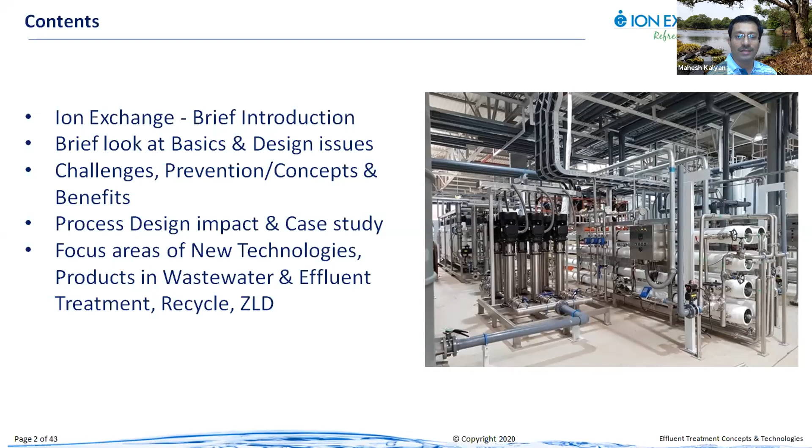So, like I said, a very brief introduction. I will start with my company. A lot of details about what we will talk about today in terms of technologies, products, and application notes are on our website. You can always log in there and download. It's free for all. So we are a 50-year-old company, in fact 55 years old now, and a leading player in the Indian market and also in the Asian market. We do complete projects in a variety of technologies for water treatment, wastewater treatment, effluents, zero liquid discharge, high purity water, pharmaceutical grade water; the whole water cycle and wastewater cycle we cover.

We are also into manufacturing not only equipment, but we also manufacture chemicals and special purpose resins, which are used in the water industry as well as in the pharma industry for a variety of applications. So this is a rather unique combination where we make equipment. We also have a very strong chemical engineering team with a very strong R&D backup, with several manufacturing locations all over India dedicated to specialized technologies. We also operate globally, exporting quite a few of our products to the Middle East, Europe and the UK. In fact, a lot of our high purity resins go into the pharma industry abroad as well.

So that gives you a rough idea of our capabilities in terms of FDA approved facilities for production and traceability when equipment or material is used in the pharma industry. And of course, a large service setup all over the country assures our customers that they are taken care of in terms of issues, applications, and so on. And with respect to quality, we can't do export and also survive in the Indian market for such a long time without a very high quality standard, and that is what our certifications talk about.

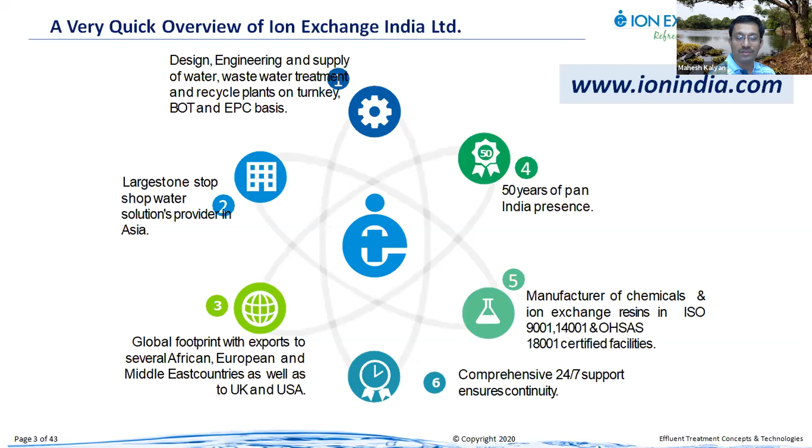Can you go to the next slide, Vijay? So this gives you a rough overview of our facilities in India. This is the only slide I have on the company at the moment, so that we save a lot of time and go into the technology part.

On the top left, in Gujarat, we make resins. The resins are basically organic polymer beads, which have a variety of applications. For example, a lot of medicinal capsules that people consume today have resins as an excipient, in which the active pharmaceutical ingredient is coated, and then you consume it. So that gives you an idea of what kind of facilities are required for manufacturing such products. And these resins are also used in the water and wastewater industry for specific adsorption, ion exchange kind of applications.

In Maharashtra, Rabale, we have an export-oriented unit, which is exporting equipment and products to Europe, the Middle East, and America also. In Goa, we have two facilities. One is a plant which manufactures equipment and assembles kits for membrane systems. We also recently started a membrane manufacturing facility. It's one of the first plants in India which is an integrated facility, where we start from liquid chemicals and out come membrane modules, RO membranes and ultrafiltration modules. So this gives you an understanding of the capability of the company in terms of really creating products made in India from basic raw materials.

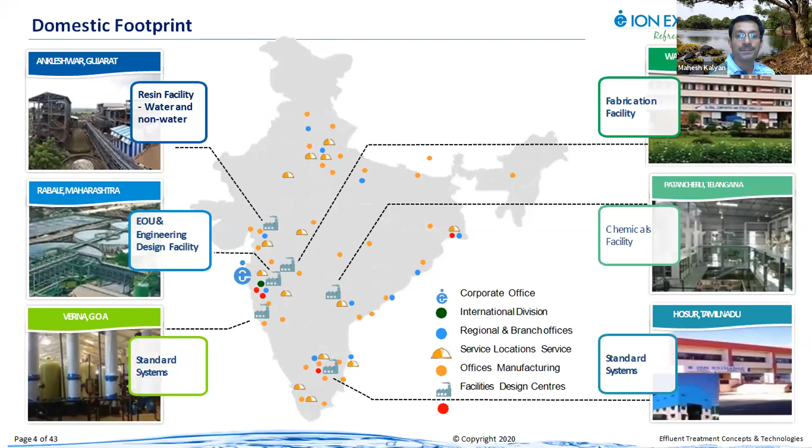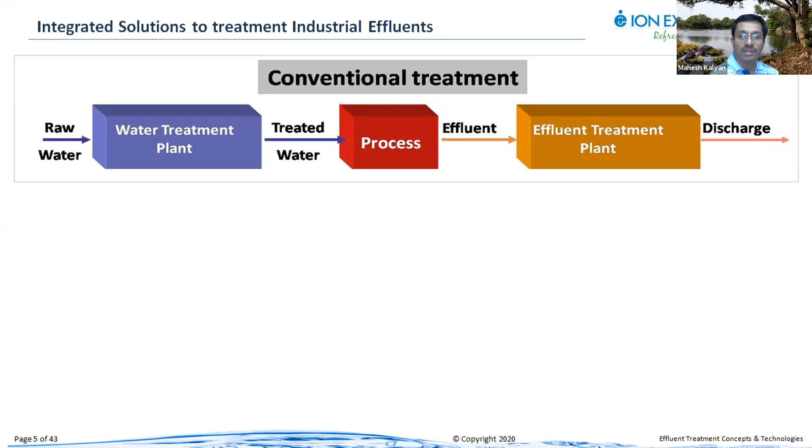So now we get into the portion of the presentation where we get the basics, so that everybody is on the same page when we start getting into the more technical aspects. So conventional treatment, where there is raw water coming on the left hand side. There is typically a water treatment plant which brings the water to a certain treated water quality, which is then used in the process. It could be used for washing certain things or in the manufacture of certain products. And after the process, out comes effluent, which has water and other waste material from the process, which goes into the ETP and gets discharged. So this has been the typical, conventional approach.

Whereas what we are looking at today is a process where we are trying to ensure we recover all the possible water out of the effluent stream, number one. Number two, in the waste stream there is also valuable material, so we are trying to recover the product also out of the waste stream. And with the recycled water, we can reduce our raw water consumption. So basically, with all this, we are lowering our complete water footprint. The amount of raw water that we use is reduced.

The amount of wastewater that we discharge is reduced, or at least minimized to the maximum possible, and also made as safe as possible for discharge, because we are also trying to remove all the contaminants out of the water, and wherever possible, even reuse the product. An example is in the textile industry, where salt is used in the dyeing process, and so far, there was a process by which we were recovering water and concentrating the waste.

And of late, what's happening is, if you are able to process that waste salt in an intelligent way, then we basically can recycle all the salt back into the process itself and reduce your salt consumption for the whole dyeing process. So which means not only are you reducing the water consumption, you're also reducing the amount of salt that is used for the fabric dyeing process. So there is, of course, a tremendous benefit, and the environmental damage is completely eliminated, because we are not sending out anything out of the plant.

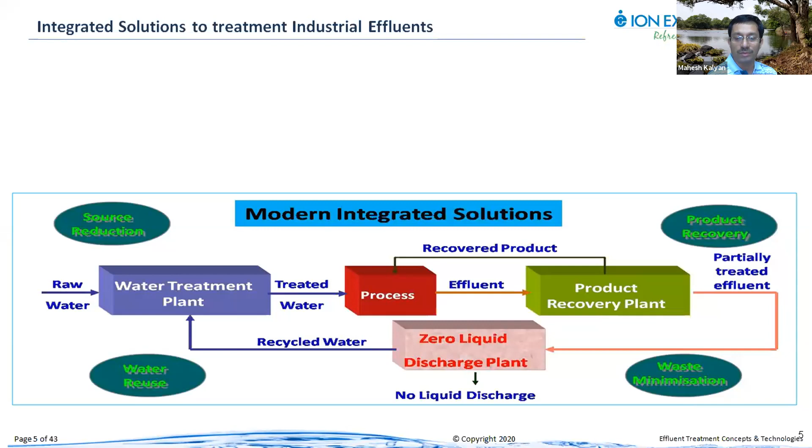So this being the overview, let's get into the next step, where I take you a little deeper into the process. A lot of us are familiar with a simple sewage treatment plant. Most of us have such a facility in our apartment complexes. We understand the municipal sewerage system. It's a process where there is a collection network. It comes to a sewage treatment plant, where the typical process is about physical separation of inerts; sand, stones, other larger items come out.

There is an equalization tank where the water is stored for some time, because the flow is not uniform. Typically, in a municipal setup, you have a lot of flow coming up in the mornings when everybody gets up, has a shower, and gets ready to go to work. Then during the day, there is a slight reduction. Then again, it picks up in the evening. And in the middle of the night, there is hardly any flow. So to normalize that flow, there is normally a facility in the plant for equalizing.

And then it goes into the treatment process, a biological treatment, where the bacteria is made to work on the sewage water. Then there is secondary treatment where it settles down, the bacteria is removed, and the water becomes that much clearer. Then it comes to tertiary filtration, then disinfection, and then it goes out into reuse or discharge. And as most of you are aware, in Chennai now, we are also getting into plants where this water is polished with ultrafiltration or reverse osmosis, and then taken back into the industry for process water use.

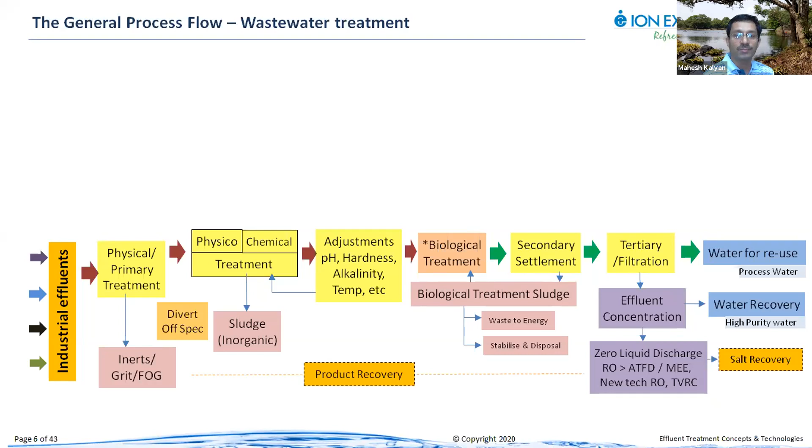Similarly, as long as you're able to segregate the waste streams well, we are in a strong position to apply a good technology for recovering the product or recovering water or doing both, or making it easier for the effluent treatment plant to handle it. So this gives you a rough idea of how the challenges are split.

In a typical municipal system, we are talking about quantity of sewage coming in and quality. Typically, if it rains, a lot of rainwater enters the sewer system. That is what Chennai is now trying to resolve with stormwater drains and rainwater harvesting, trying to keep the sewage system independent of stormwater. But as long as the plant is being fed the designed quantity of water and quality of sewage, it is able to work very well. The minute one of them changes, you have upsets.

On the ETP side, the effluent treatment plant, we have to be worried about a lot more things. It is not just the quantity, there is a variety of waste. When the waste comes in, the timing, because not all plants produce the same thing at the same time. There are different industries or different processes running. Each of them might discharge their effluents at different points in time. So that is something we need to consider.

And then manufacturing upsets. When the plant has a problem and there is suddenly a dump happening, how do we handle that? So these are the things that a typical ETP plant operator needs to worry about.

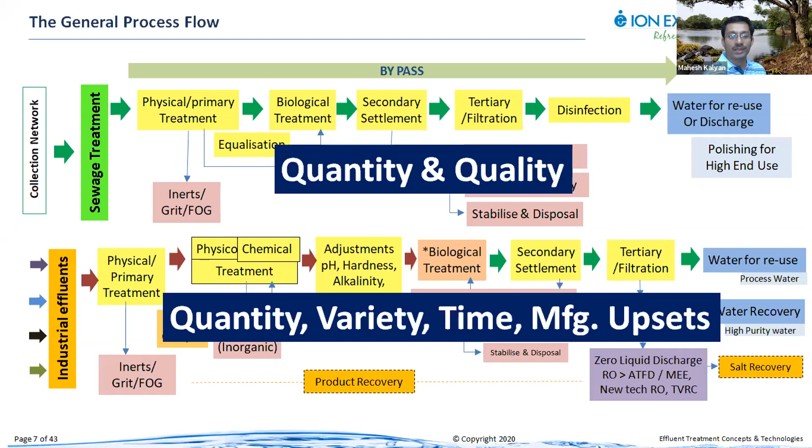And when we come into the whole analysis of the wastewater effluent system, we look at it from, let's say, three perspectives. The first one, the orange box, talks about the challenges that we face. Typically, this is what Mr. Bhaskaran was talking about. Every waste stream is valuable. The minute we mix them all up, it becomes a huge challenge.

As long as we can segregate the waste streams, and identify and study them, there is always somebody who will find that waste stream useful for his manufacturing process or his production. So as long as we are able to consistently deliver a particular waste stream of a certain quality, it can be made use of by somebody else.

Then again, the second point on the orange box is the characterization. COD stands for chemical oxygen demand. TDS stands for total dissolved solids. So these are a couple of parameters which determine how the plant has to be designed. So the minute we mix up a couple of these streams, it becomes very difficult for the ETP to be optimally designed. You might be able to still run the ETP, but efficiency will take a hit.

Then there are certain non-biodegradable chemical oxygen demands which need a very, very strong chemical reaction to break down those kind of complicated chemical molecules, benzene based or certain new generation long polymers. Then, of course, could be contaminants, heavy metals. Heavy metals have a big impact on the bacterial activity, and are also difficult to remove from the water stream. So how can we remove it initially itself?

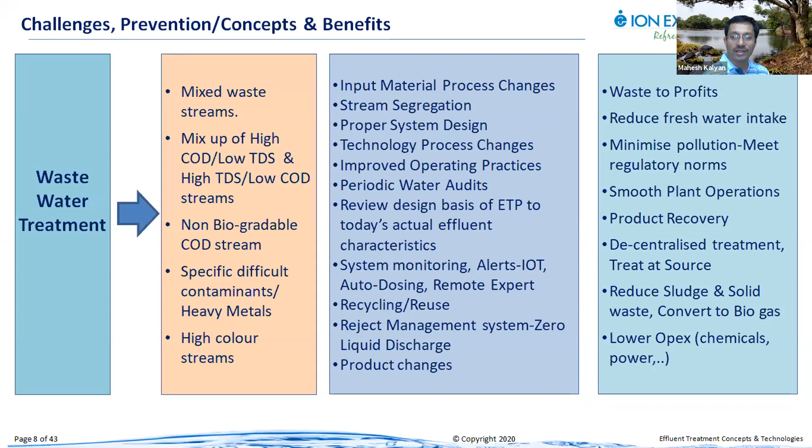So I will just have a quick case study. All of us, in the post-COVID situation, have been spending far more time in the kitchen, I guess. So I thought I would take an example from a large-scale kitchen, so that we're able to relate with the kind of effluents and why this effluent analysis becomes a critical topic. So this is the data from a kitchen that we recently studied.

The initial data that came to us was that they have a problem with their STP, a 200 KLD, 200 kiloliters per day STP, which was handling about 50 kiloliters of sewage and about 150 KLD of kitchen wash water. But they have a big problem. Typically what we know is all the load is organic. There are no heavy metals. There is no harmful stuff here. These are all easily biodegradable stuff. So why should there be a problem?

So the way we go about it is something called composite sampling, where we look at the waste streams every 1 hour. We take a sample and mix them all up, and then try to get a complete representative sample of that particular load over a period of 24 hours. Now we look at the flow patterns. Weekend load: this kitchen was supplying food to schools, which means they stop operating on weekends. So Monday morning is the peak load, and Friday evening the load goes down. The kitchen stops for Saturday and Sunday.

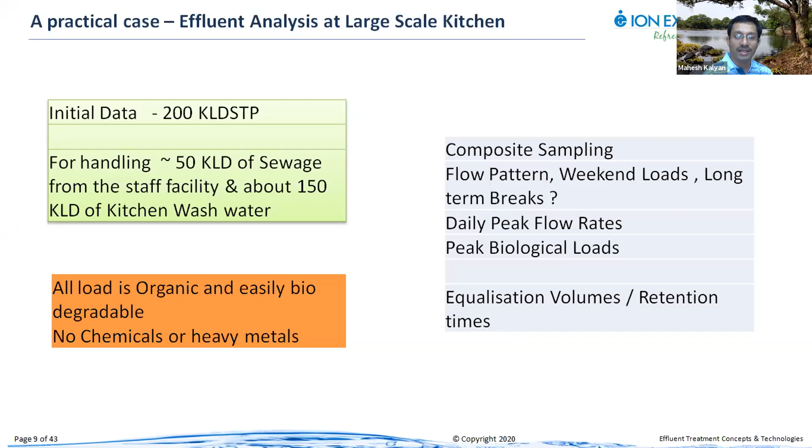Again, schools have summer breaks, which means 2 months in a year the kitchen is not running. So what happens then? How is the plant working in those days, and how does the plant start up again once the long break is over and the kitchen immediately comes back into operation? What are the daily peak flows? What are the peak biological loads? This is the study, and what comes out of it is something like this. So this 200 KLD is broken up into all these different streams.

All of us now, with experience in the kitchen in the COVID days, will look at this as typical stuff that we all do. We wash the rice. Dal is a part of the meal that is also washed. Then the rice starch is removed. The kitchen is washed every day. After the cooking is done, there is the floor washing. Then vessels come back, so vessels are washed. And vegetables are washed at a certain time. So this is the process flow they have, and all these different flow volumes.

And those yellow boxes. Can you go to the next slide, Vijay? This gives you an idea of all the different loads. TSS is total suspended solids, TDS is total dissolved solids, COD is chemical oxygen demand, BOD is biological oxygen demand, just to give you an idea. So the different flow volumes, and what kind of contaminants they have, is what I have highlighted. So the original concept was to mix all this together and treat.

And this, of course, is not sustainable, because once you design a plant for these kinds of loads, look at item number 5, for example, total dissolved solids: 13,790 is one parameter, at 30 kiloliters per day. And on the right extreme, you also have the sewage, which only has 400. And the sewage plant is going to be operating more or less continuously, because the staff will be there all through, whereas the starch water will come only 5 days a week.

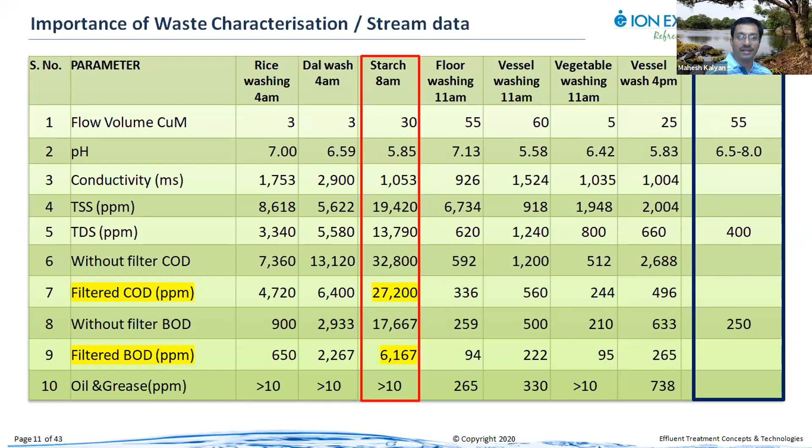And all the rest of the water, the rice wash, dal wash, the floor washing, all that could be combined, and we could still have a reasonably compact system handling that. The minute we try to mix the starch water or the sewage water in that, you have a very sub-optimized system which will not work, because it simply cannot handle such extreme variations. So this gives you a rough overview of how effluents need to be really categorized very carefully. Can you go to the next slide, Vijay?

So that is where water audits become a very, very important portion. Again, people like IWMA, CII, and even we as a company do water audits. This comes out of a lot of experience, multiple disciplines. It's chemical engineering. It's understanding membrane processes, what can work most effectively for this effluent. So this kind of team, once it studies the effluents available in the plant and also understands performance issues, can probably give a much better recommendation, a good design which can handle all the variants.

The second important point is flow metering. A lot of us estimate flow based on our gut feeling. A pump is running for 3 hours, it is going to discharge so much water. That could probably be the basis of the whole flow audit itself. This again is true, but more often than not, the pump's performance changes with a lot of parameters. What is the head? What is the kind of scaling on the discharge pipe? What is the level of water in the suction tank? All of it determines the flow output of the pump.

Traditionally flow metering was a costly subject because the flow meters were expensive. But today we have a lot of technology with clamp-on meters, temporary meters. You can get someone to come and fix a couple of meters, do a flow audit for 2-3 days, 1 week, and get a very good, accurate map of the whole waste stream coming from different units in the facility. Either it's a single big factory or even multiple factories coming to a common effluent treatment plant, you can do a good flow audit, which will give you a very good, accurate prediction of the volumes.

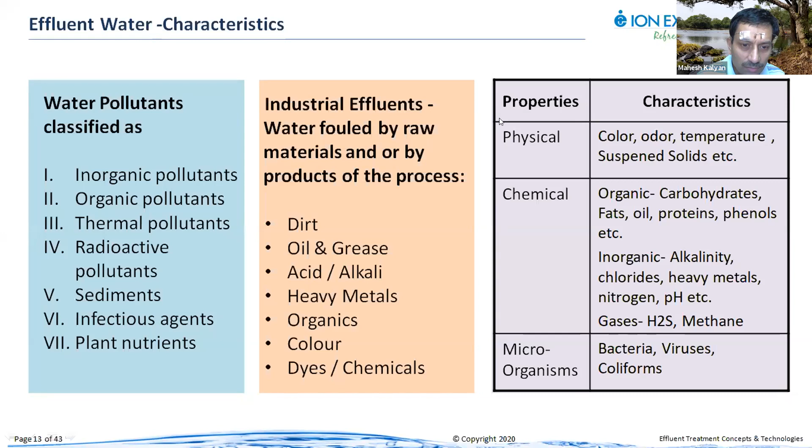I have a difficulty in changing the slide. Yeah. Vijay, shall I take over? Yes, sir. Yes, sir. Yeah, a moment, please. Yeah. Okay. Yes, sir. No worries. Yes. So while Mr.

Mahesh has just emphasized the types of technologies and the steps to achieve zero liquid discharge, I would rather spend time step by step on primary treatment, the biological systems, the tertiary treatment plants and reject management, to achieve zero liquid discharge. Basically, the primary treatment is one of the prominent steps to achieve zero liquid discharge, because here you control the complete downstream performance of the anaerobic process or tertiary treatment, particularly in terms of saving the OPEX cost of a particular design.

On the primary side, we look at ceramic filters, basically for product recovery, and advanced clarifiers in association with the existing conventional primary clarifiers, followed by a laminar clarifier or an HRSCC, with UHRCC being one of the advanced clarifiers here. DAF is one technology which plays an important role in removing the emulsion oils. The advanced oxidation systems and electrocoagulation systems also constitute the primary treatment.

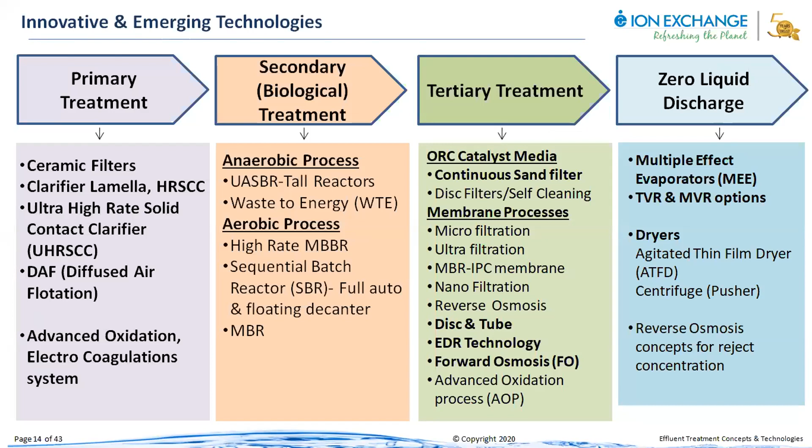So in the primary, we are all sure and thorough with the process: screenings, grit removal, oil removal, these are the prime steps, and further the clarifications. One important thing in the oil part is to concentrate the coolant oil, or the oils, at the beginning, where you recover this oil with the help of ceramic filters. I'll show you in the next slide how the ceramic membranes do the role of oil concentration.

In the sedimentation, clarifiers and primary clarifiers have played a major role, where you do the pH corrections, heavy metal precipitation, and also remove the suspended solids to a great extent, so that the downstream biological system isn't hindered in terms of performance. In the clarifiers, we'll look at the lamellar clarifier or the HRSCC. UHRSCC is one of the advanced technologies here.

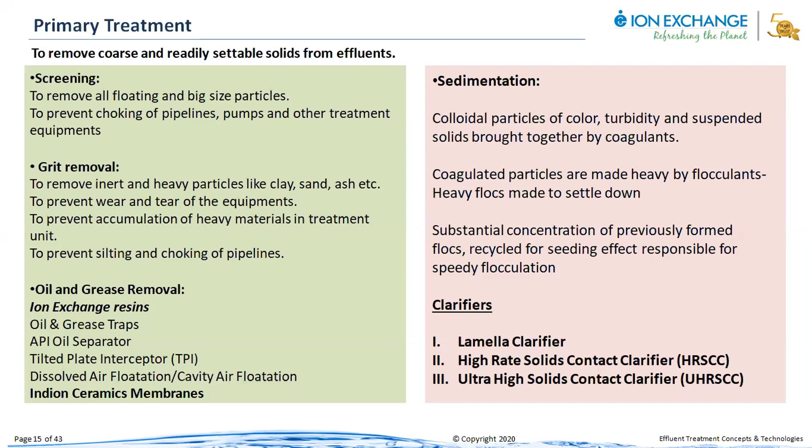The ceramic membranes basically have an MOC of silicon carbide. The silicon carbide gives the membrane more toughness, where it can resist up to 800 degrees centigrade. It operates in the pH range of 0 to 14, and high flux rates can be drawn, up to 300 LMH in terms of the permeate from the membrane surface. The fouling of this membrane is very low. That's how it becomes a high performance membrane system.

So the applications: if you want to recover a product which is contaminated with oil, and you would like to recover that oil and concentrate it further for reuse or for sales, this membrane can be used. In recovering heavy metals, the ceramic membranes also play a role. And of course, the basic function of any ultrafiltration membrane is to remove colloidal particles and TSS, and they're used as a pre-treatment.

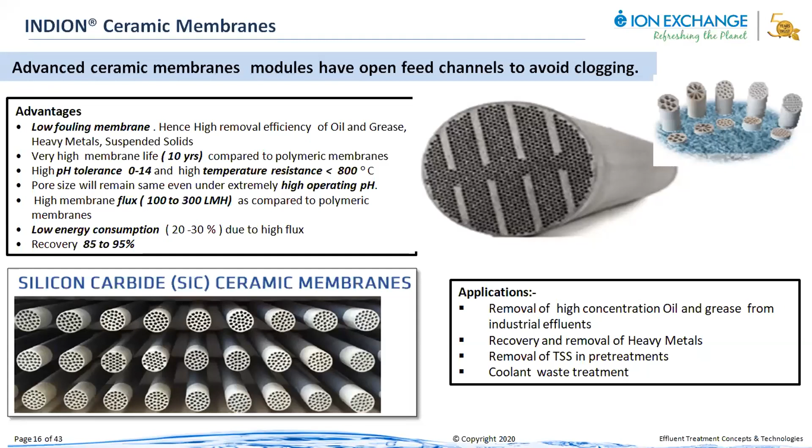So when we look at the ultra high rate solids contact clarifier, we must understand the basics of the lamellar clarifier, how its performance is achieved with rise rates of about 1.4 meters per hour. On the right side you see a picture of a typical lamellar clarifier. The raw water, the water which needs to be treated, is pumped into an SMFT, which is a static mixer flocculation tank.

In this tank, we add flocculants and coagulants, so that the particle formation is made heavier and further settles down onto the lamellar plates. The lamellar plates are inclined in these slots at about 60 to 70 degrees, forming an inclined plate technology.

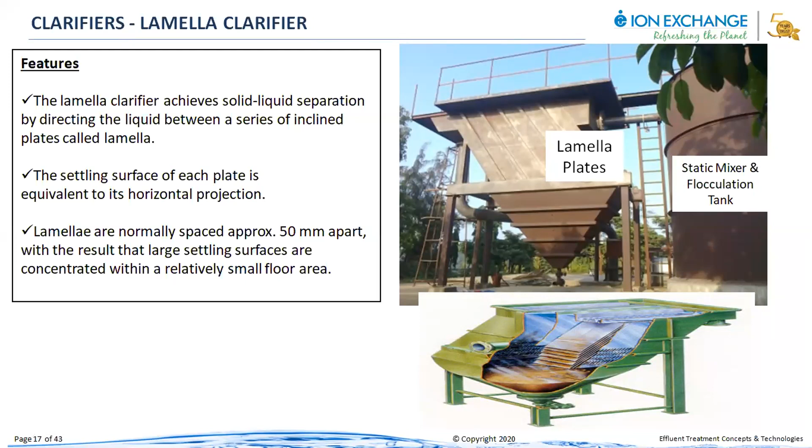In the lower picture you can see the water rise on the surface of the plates, and the heavy particles which have been agglomerated or flocculated settle down at the bottom of the hopper, and the clear water comes out. So the lamellar clarifier is a proven technology existing for the last 20 odd years in the Indian context, and abroad probably for a very long time. The second clarifier we look at is the high rate solids contact clarifier.

This is taking over the conventional clarifiers, where we talk about clariflocculators, where the flocculation zone and the coagulation zone is outside the premises of the clarifier. But within the HRSCC, there is a draft tube which is inside the clarifier. The chemicals are dosed in this particular zone here and given a retention time, and within a very short time of retention, you will achieve a good floc which overflows, and then it is collected at the bottom of the tank, and the clear water comes out with rise rates up to around 3.6 meters per hour at the velocities you have in a typical HRSCC.

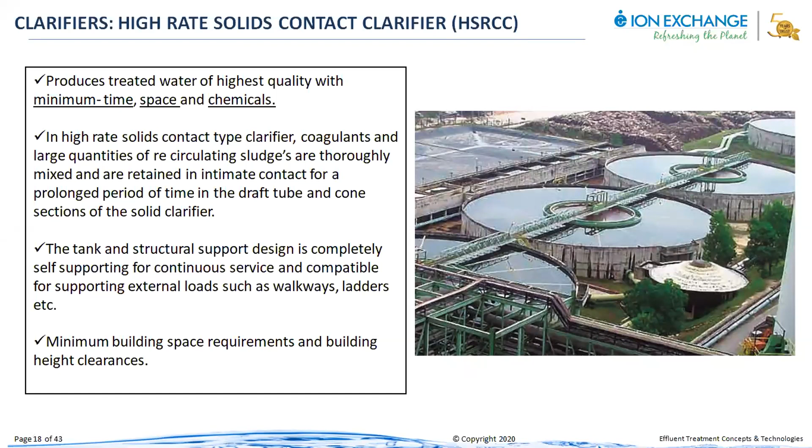So I think we'll spend a little more time on this particular thing, which is the current updated technology, where it takes over the advantages of a lamellar clarifier and HRSCC. What it does is it integrates both into one single system. The raw water is pumped at the bottom of the tank, and then it is pumped into the draft tube. This particular area is a draft tube, where the polymers and the coagulants are dosed from the top with the drive on the top, and it's continuously agitated.

In the process, you get continuous flocs of a heavier size, which settle down at the bottom, and you get clear water which is deflected and passes through the lamella plates, which are inclined on either side of the draft tube. So you get clear water, and in terms of TSS or turbidity, there is good control.

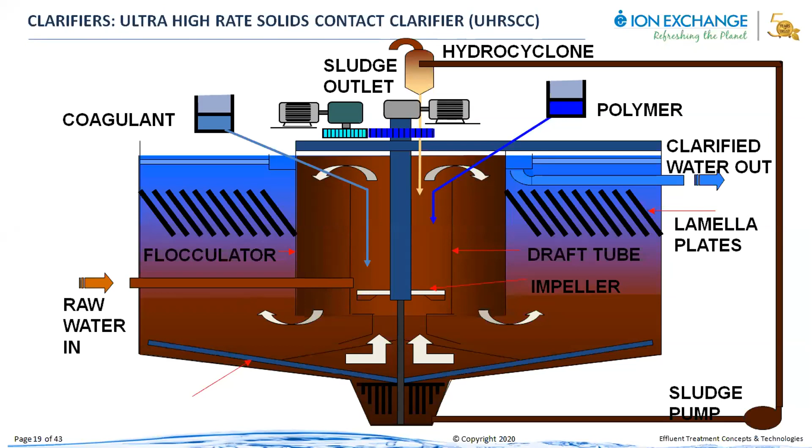Now, what makes the ultra high rate solids contact clarifier a more advantageous product is that the rise rates in this particular clarifier go up to 15 to 20 meters per hour. In doing so, the chemical consumption compared to normal clarifiers will be saved up to 15 to 20%. And the energy, the footprint, and the overall operational efficiencies are improved in a UHRSCC.

So where do we find these applications? In a lime softening process, removal of colloidal silica, color removal in the industry, white water recycling, or heavy metal precipitation. Once you get proper treatment out of this, you can achieve a TSS less than 15 ppm. That is very significant when you see the operational performance of a clarifier, even in turbid conditions.

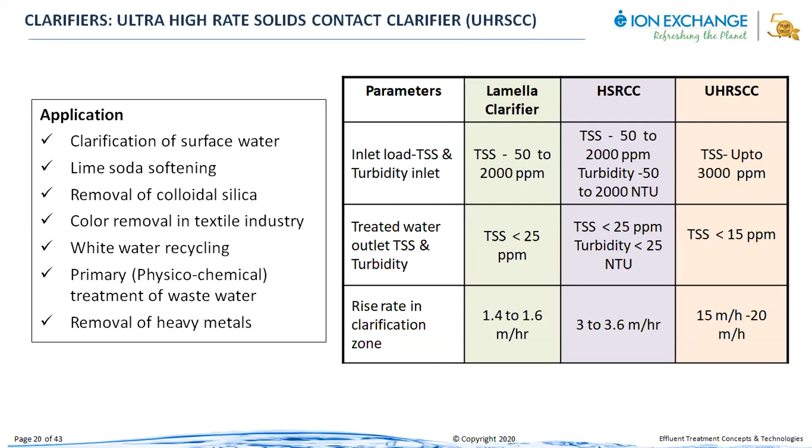So from the primary side, we'll move into the secondary. I'm sure I need not introduce the basics of this particular thing. Still, we'll look at what we are trying to achieve. In secondary treatment, we try to remove the organic matter via oxidation by microorganisms, in a natural way rather than using any kind of toxic chemicals. So COD and BOD are the familiar terms we are going to use, where we would like to remove this particular stuff with bacterial growth in the reactors.

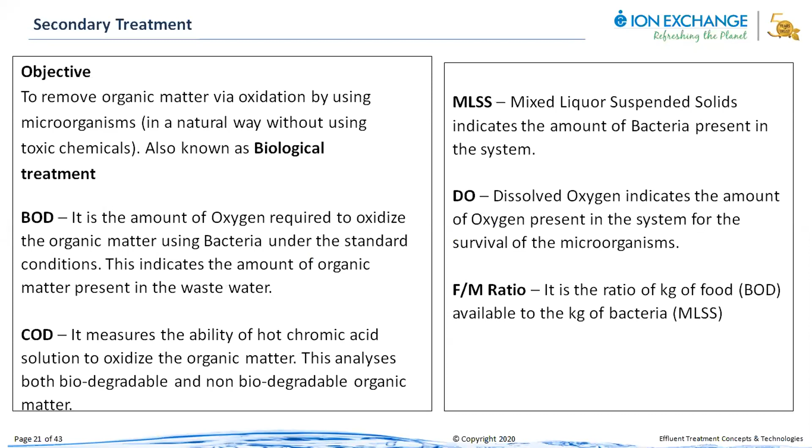In the anaerobic side, digestion has existed for a very long time. So UASB, where the COD loads are very high, and you would like to get the energy, I mean biogas, without spending any kind of external air. Anaerobic processes play a major role there. So here we will be looking into tall reactors in the slides to come.

In the conventional, we look at the fluidized media reactors and the MBR technology, which will have a performance where the water becomes absolutely to drinking standards. That is how the MBRs perform.

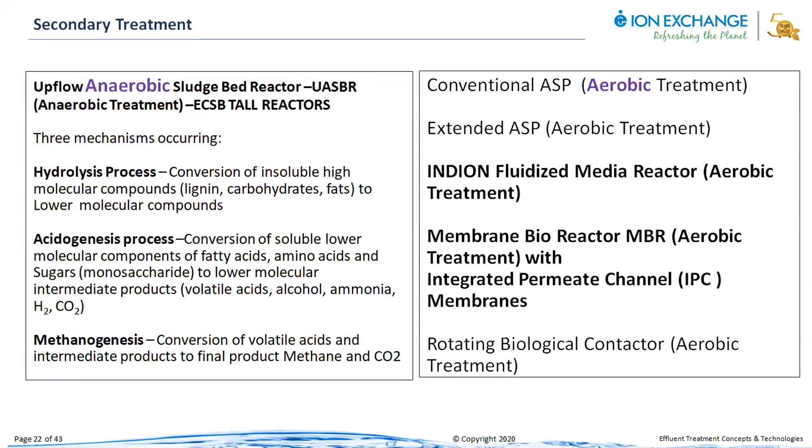These are the conventional UASB reactors. What Ion Exchange has done in the process is, see, this is a picture of a typical UASB reactor. There were a lot of drawbacks in the conventional design in terms of distribution, the gas being collected, the biomass separation, or the corrosion within the reactor.

So Ion Exchange has ensured that all these parameters were addressed, like corrosion, with the change of MOCs from MSEP technology to FRP, and the distribution was done through a top distribution system where the water is introduced to the bottom of the tank. In anaerobic reactors, basically the function is ensuring there is a continuous feed throughout the complete surface. Now, what we found out was that in the normal reactors, it was clogging because of the pipe distribution system there.

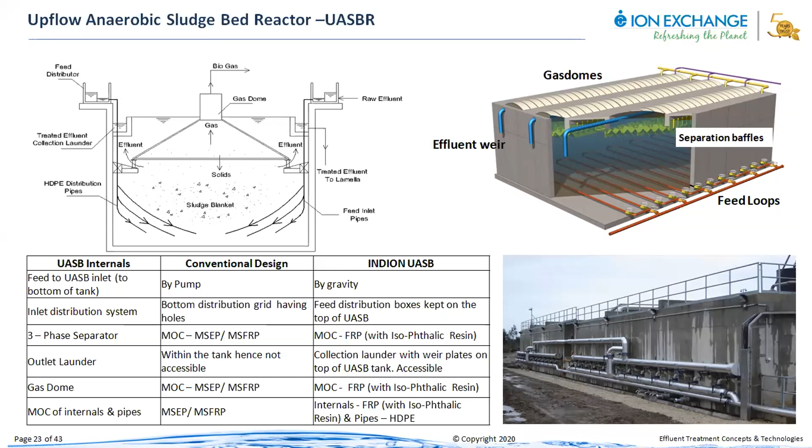Yeah, this is a state-of-the-art kind of technology called tall reactors. The conventional reactors had a lot of setbacks or performance issues in terms of digesting high COD levels. Now, a tall reactor can handle up to 35 kgs per meter cube per day kind of volumes there in terms of COD.

What is done is the water basically can travel up to a 25 meters kind of a reactor, unlike a conventional reactor. So the water is introduced at the bottom of this particular reactor with a fine distribution system, and it passes through two different separator zones where the gas and the biomass are separated out very efficiently. The biomass is returned to the bottom of the tank, while the gas is collected into the next chamber, which is called a neutralization pit.

Now this makes the anaerobic reactors different from the existing reactors in the conventional market. So the USBR or the ECSB technology has a neutralization pit which collects the biogas from the various parts of the reactor of the ECSB, and the complete gas is under pressure, ensuring that there are no leakages. So the corrosion in this kind of a reactor is also minimal, because no external air has been provided, and there is no chance of any kind of slippage of biogas either.

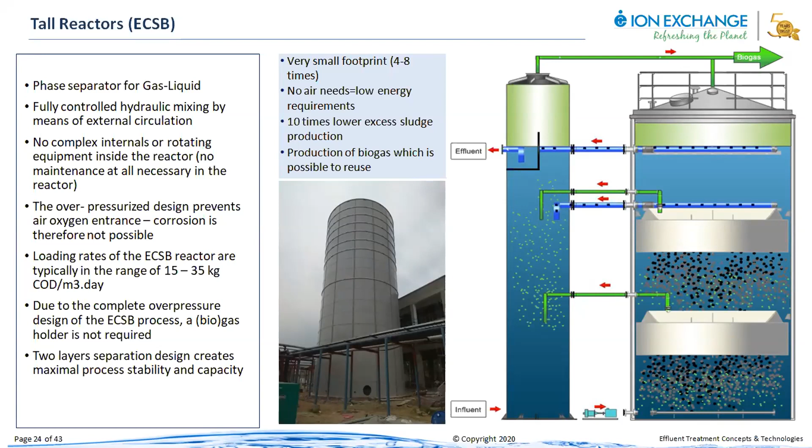So in the aerobic treatment, we have the fluidized media reactors, also moving bed bioreactors. Basically, the media is suspended. This is a typical MBBR technology, where the water is collected in the collection tank and is pumped into an aerobic zone 1 and zone 2, where the media is suspended, and with a retention time of about 1 to 2 hours, the water is absolutely treated for the COD and BOD, and eventually it passes into a next level of treatment using lamella plates as a technology.

There are also multiple ways of doing it, but we felt that this particular plate technology is easy to clean. So the water rises above the plates and then comes into the chlorination zone, where it is further sent for tertiary treatment. The media which has been suspended has a good surface area for the bacteria for attached growth.

The high rate MBBRs are more significant for industrial wastewaters, while the basic MBBR technology has a limitation in handling industrial effluents. It was more for sewage treatment plants. But when you look at high rate MBBRs, the media used inside is a highly porous media with a carbon impregnated substance on it, so that there is high porosity, and the adsorption of the COD or the BOD on that particular surface is also high.

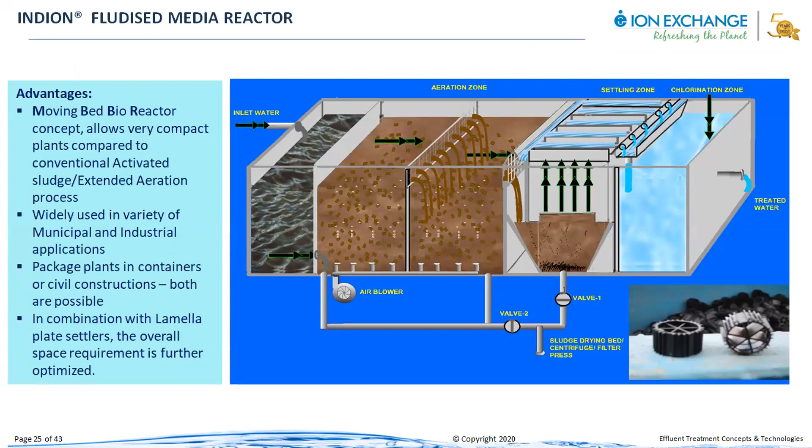So now, Vijay, I'll just make one point here on the earlier slide. See, in a typical MBBR, what Vijay talked about one slide before, here it is mainly an aerobic bacteria that is operating. Whereas in the high rate MBBRs, the microbiology is far more sophisticated. Can you go to the next slide?

So in these kinds of media, within each of those plastic, let's say sponge-like media, the outer surface is a high oxygen surface, and the inner area of that sponge becomes a low oxygen surface, where different kinds of bacteria are able to operate within the same tank itself. And that is the trick, or the key difference with respect to how the whole process operates.

So superficially, it all looks the same. In one place we use a plastic kind of disc or something, and in another place we use a plastic foam or a sponge. But the way the microbiology works is very, very different. And so this is where this whole ETP topic is a multidisciplinary topic. You're talking about chemical engineering. A lot of microbiology is coming in, and of late it is getting even more sophisticated.

The same story also with the tall reactors, anaerobic reactors. The whole microbiology there, in terms of the kind of sludge that develops on the reactors, is very different from what we were generally used to the last 10 years. Yeah, back to you, Vijay.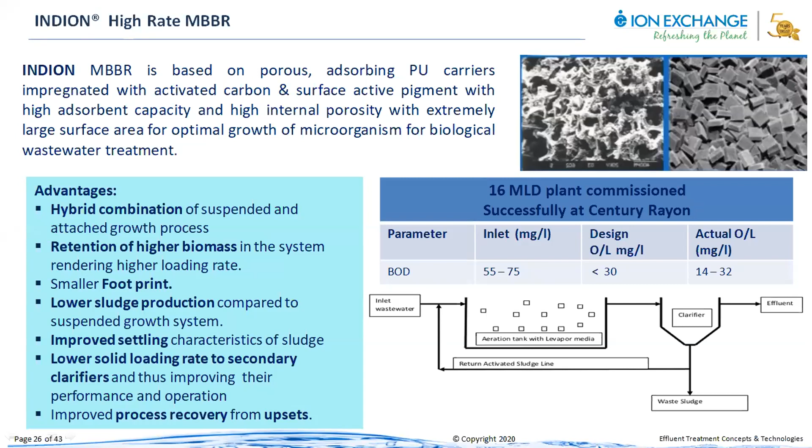Yeah. I think we have a success with this particular project at Century Rayon. So that is how we felt that this particular thing can be more useful for the aerobic treatment systems compared to the extended aeration or the secondary clarifiers.

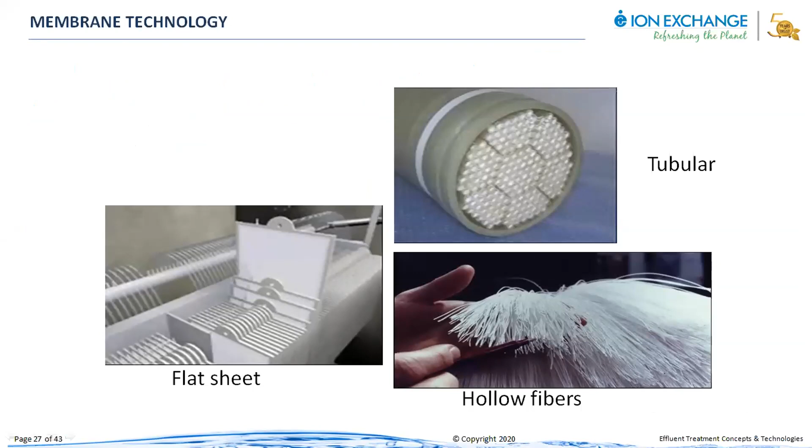So we'll move to the membrane technology, which is one of the sophisticated things in the treatment of both sewage and also the industrial wastes. For quite long, the tubular, the hollow fibers and the flat-sheet membranes are in the market. But before we move into the ones which Ion Exchange is looking at, the IPC membranes.

For the concept, in a particular process of handling the sewage water, the water is subjected to the anoxic treatment and then aerobic treatment, and further it's sent into an external MBR, where the membrane acts as a physical barrier for suspended solids and also the viruses and the bacteria, and the clear water is sucked out from the membrane surface.

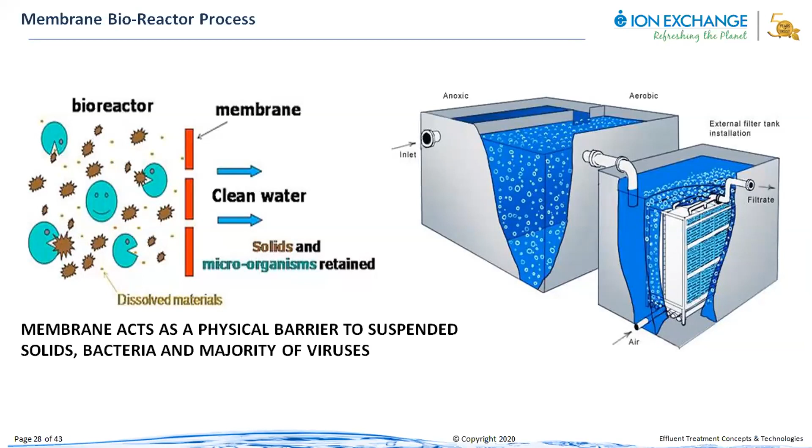So how does MBR make savings when we look at a conventional process or an ASP process? It cuts down on a lot of equipment related to aeration, clarifier, recirculations, the tertiary treatment, and further polishing of that. So an MBBR technology is superior, but the MBR further exceeds the performance of the MBBR technology. This is also existing in the Indian market for almost 15 years now.

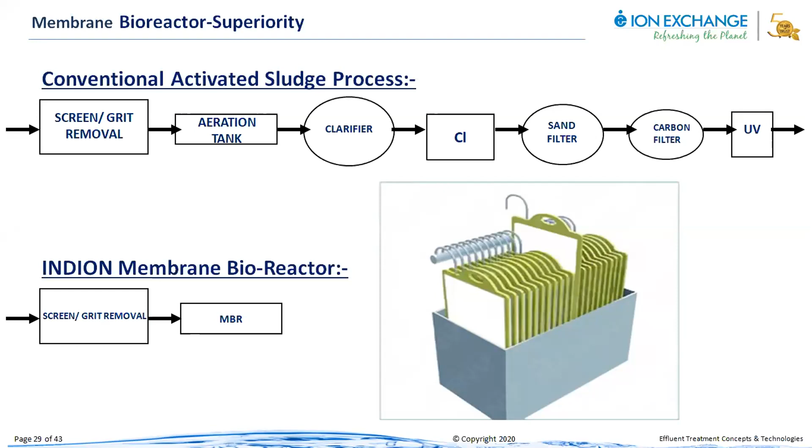But yet there are a lot of issues in terms of fouling and the flux rates, and issues related to the performance of the membrane and the life of the membrane coming down. So in order to address these challenges, Ion Exchange has tied up with a company in a joint venture for developing specific membranes called integrated permeate channel membranes.

Now these are basically flat sheet membranes, like a net, a textile coated network, where the membrane is pasted on the surface, and the internal structure allows for the removal of any suspended solids; it acts as a barrier.

Okay, so by improvement methods, what we are looking at is to increase the flux rates as high as 40 to 50 LMH and reduce the transmembrane pressure. So the TMPs are up to 2, where the membrane cleaning is easy and the membrane ruptures are very minimal, and you get outlet performance with BOD levels up to almost 2 ppm. So that's the level of achievement when you have it in the form of an MBR.

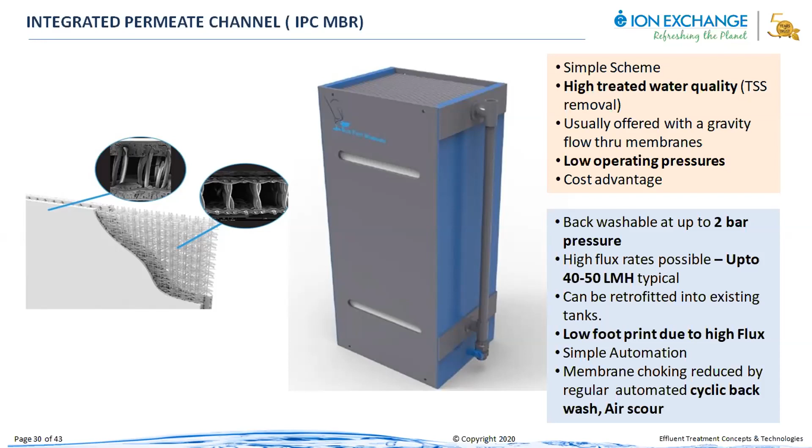Yeah, this is a site installation of an MBR at a pilot location. So what we found out was the BOD levels are achieved up to 99%. The phosphorus levels are also at the minimum. So nutrient removal is also possible when we go through this particular process.

The coliform bacteria has a 6 log reduction, to get pure clean water even for drinking purposes. Of course we don't recommend it, but that's the quality you get out of an IPC membrane.

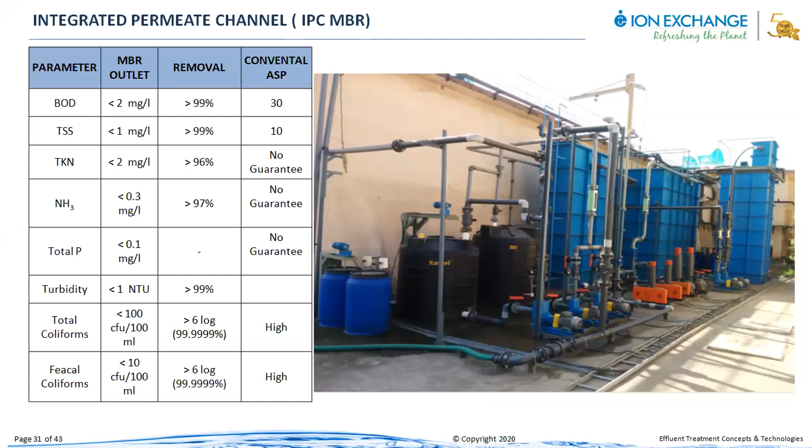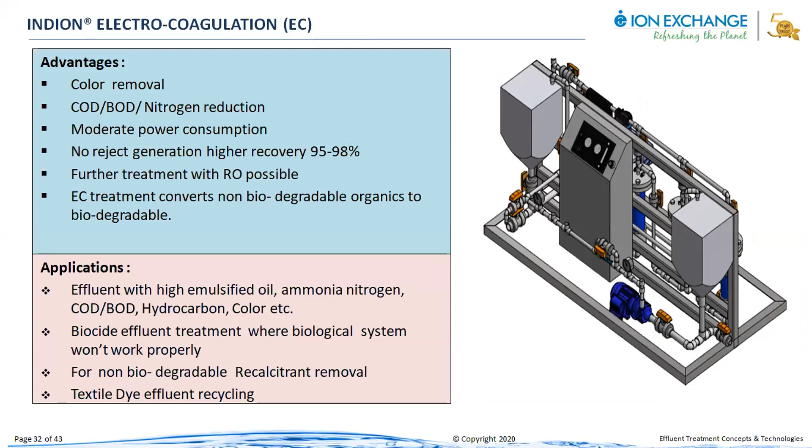The electrocoagulation systems are also finding application for COD, BOD and nitrogen reduction, and they are also used as pre-treatment equipment in the oxidation systems, where the downstream process equipment size can come down, and further the operating costs are minimal.

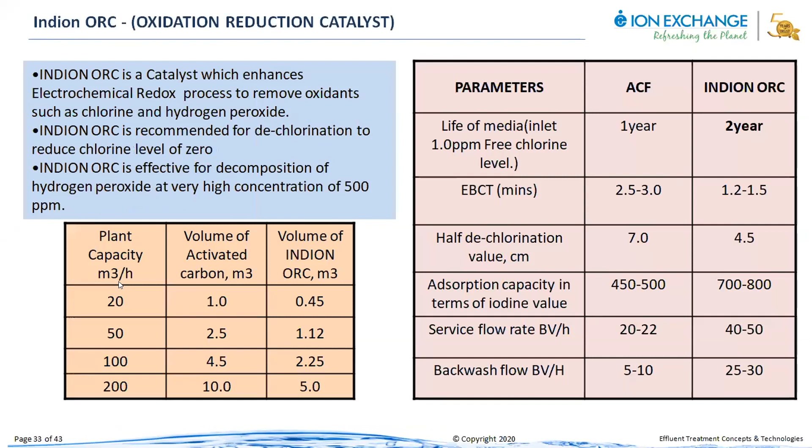The ultrafiltration and the RO membranes have been used in the tertiary treatment for a while, but we look at the next level of the RO membranes in terms of disc and tube. The disc and tube membranes can take COD loads of around 5,000 and can handle as high as 50,000 TDS levels.

In a normal spiral RO membrane, a COD of not more than 100 ppm is allowed, but in this case you can go up to 20 or even 25,000 ppm; the COD levels are handled in this disc and tube RO.

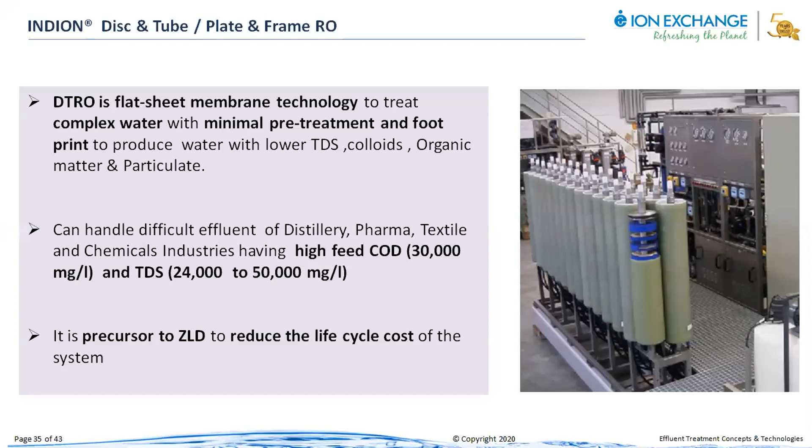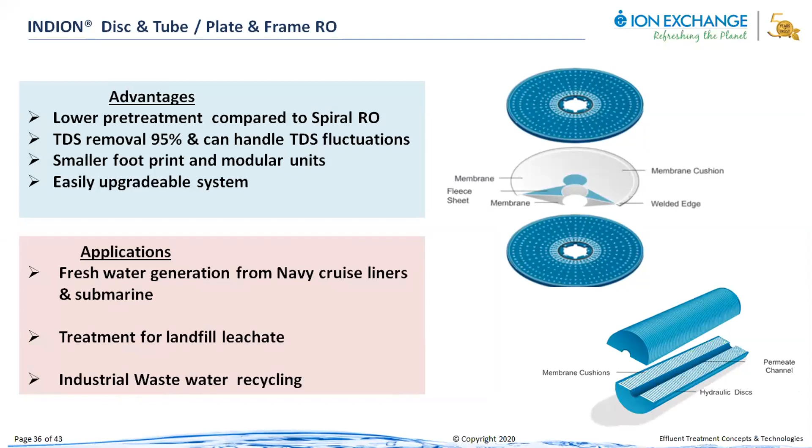So currently these installations mostly are found in the Navy ships or the submarines, where the disc and tube RO plays a major role. But in the textile applications and also leachate, we are seeing that disc and tube membranes are replacing the spiral wound membranes.

FO is the latest addition to the reverse osmosis systems, where high TDS water up to 70,000 ppm can be addressed with a membrane where the exchange happens with low energies. For example, desal membranes go up to pressures of 60 kgs, where you get a permeate of about 400 to 500 ppm, but the energy cost there is about 3 kilowatt-hours per meter cube.

So to address the issues related to performance of high TDS waters about 70,000, FO plays a major role. We have yet to get pilot plants for this, but its trial is in process.

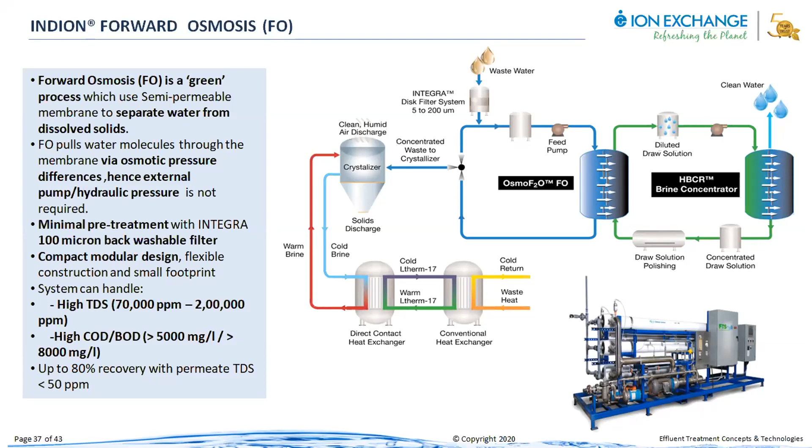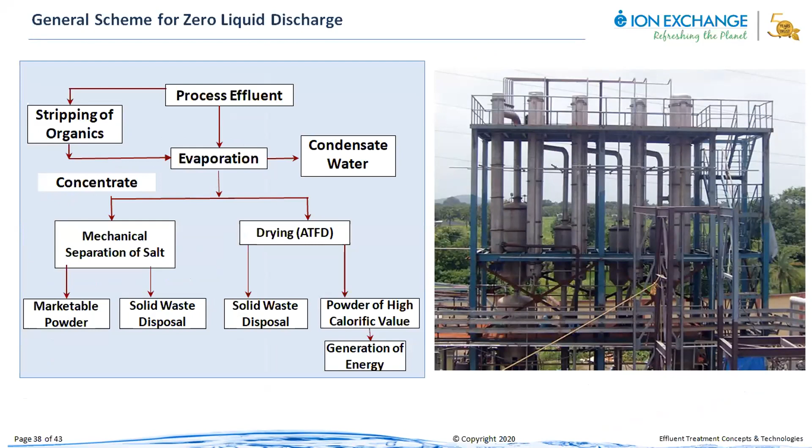So zero liquid discharge basically talks about taking the RO rejects and further getting the condensate waters and also the salts, which we achieve using forced circulation evaporation. Okay.

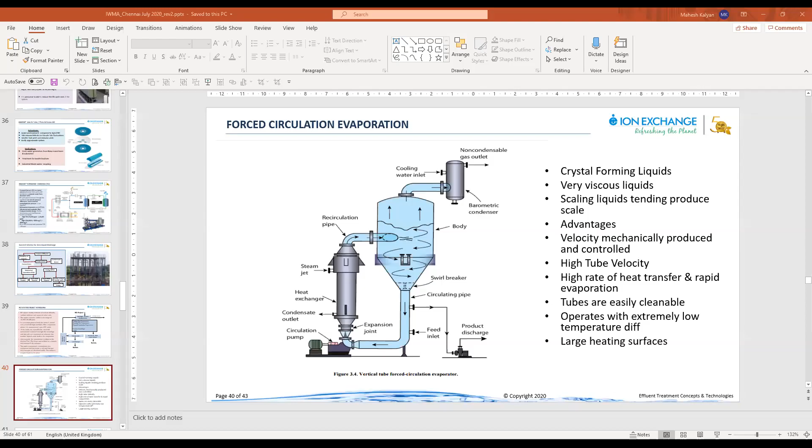Hello, Mahesh, I'm not able to move this slide. One second, I'll just repeat. Are you able to see it now? Yeah.

So to achieve zero liquid discharge, normally for wastewater treatment we prefer forced circulation evaporators, where the calandria and the flash vessel are arranged so the wastewater is introduced at the bottom of the calandria, and it is flashed in the next vessel. So this is a typical zero liquid discharge forced circulation evaporator.

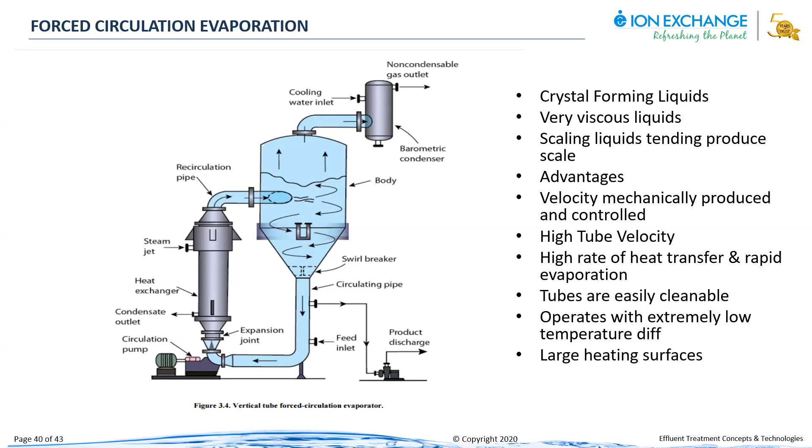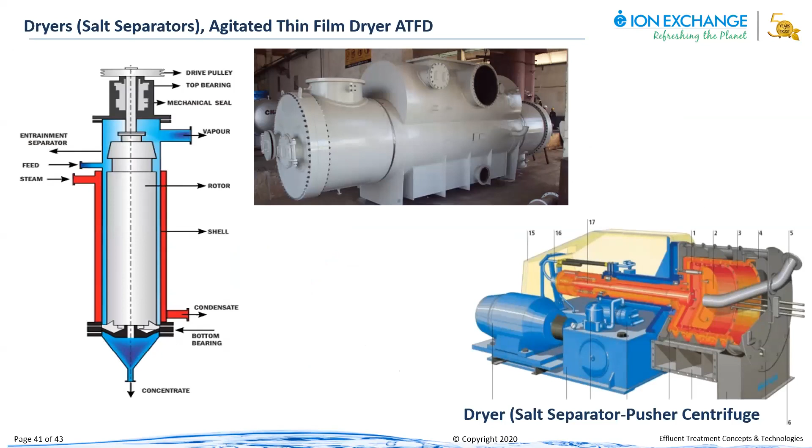Further to the evaporators, the final step is to get the salt out using the ATFDs and the salt separators. Mahesh, I think that's the typical products we have.

Let's take the questions now. Yeah, let me just. So we can take 15, 20 minutes for the Q&A; we have really overshot. I don't know whether you can see this chat window on your screen.

There's a question from Mr. Chatwal: do you provide online monitoring stepwise for treatment and link to SCADA of processes? Online monitoring stepwise is definitely feasible. Online monitoring of certain basic parameters is not too expensive to implement. Temperature, pH, conductivity kind of parameters are easy to monitor. But as we get into more sophisticated parameters like BOD or COD, it becomes expensive.

So we are looking at outlet discharge online parameters. We definitely want to monitor as much as possible; online measurement of BOD and COD is possible today. Turbidity is always possible. So these can definitely be taken to the SCADA quite easily.

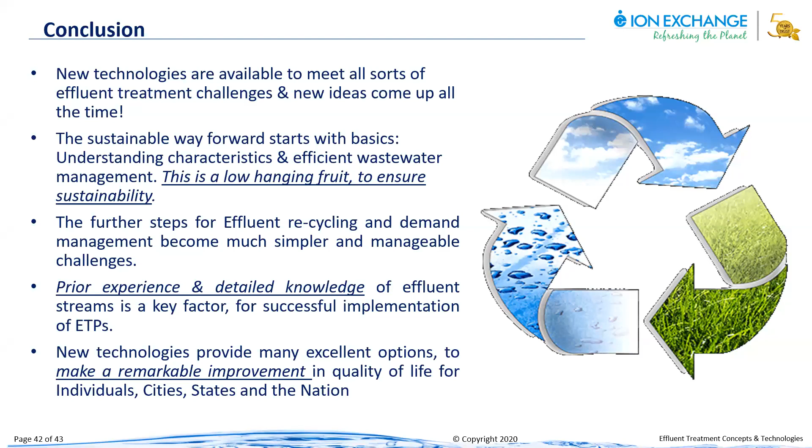Okay, so there are a lot of questions on the quantity of... Yeah, go ahead, Vijay. In terms of the oil removal in the ceramic, less than 10 ppm. So probably we are looking at high concentrations of oil, say about 10,000 ppm, which can also be concentrated in ceramic systems. So less than 10 ppm won't be viable for using in the ceramic membrane systems.

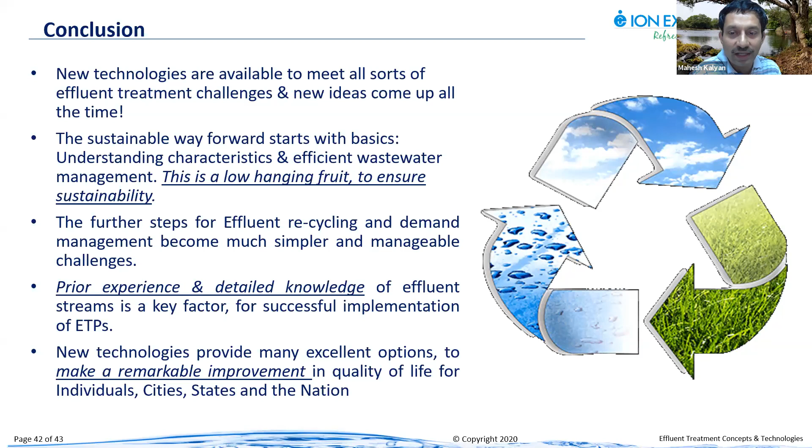So I would like to end the session with a simple statement: water is everybody's business, and together we can make a difference. This has to be a slogan for each one of us. We have an impact on consumption and on discharge, and as long as we act responsibly, the whole society and the whole nation can also see the difference.